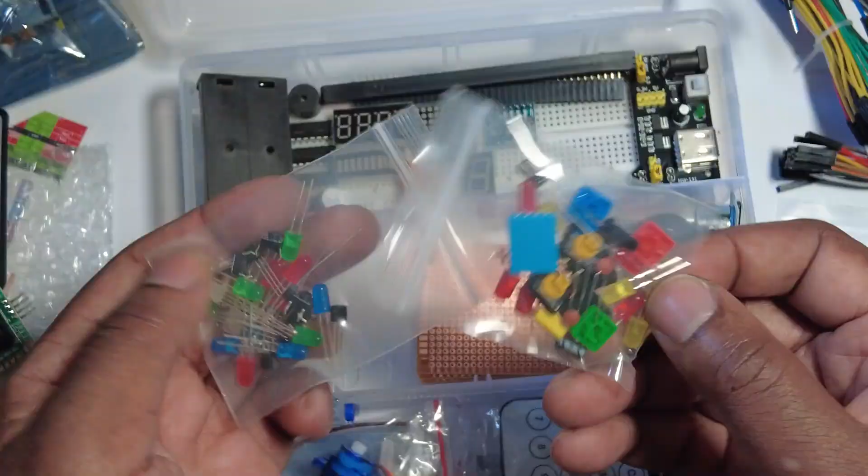Long story short, there were just too many factors working against the project, from my limited experience with electronics and grand designs to the recent disruption of having to move.

But let's get something straight, this isn't the end. While it might have been worth a couple more likes than usual if I made the deadline, it wouldn't be worth rushing the process. After all, I want the final product to be spectacular. This is a silent mode project, and with patrons or without, it makes far more sense to regroup and aim for an even better result next year.

Since the last episode, the focus has shifted toward the Advent Calendar's design. Although more work could have been done with the electronics, especially dealing with this expensive 12-volt motor and motor driver, I realized that the design would dictate the electronics.

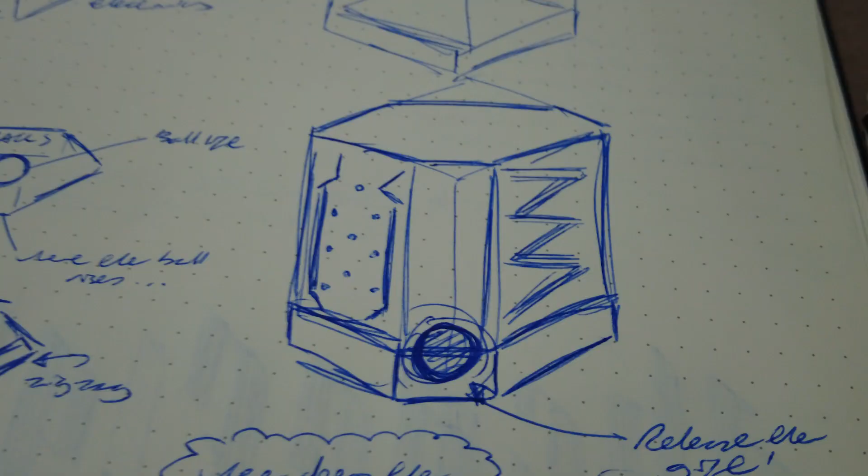So the original idea was to have the ball either travel down a plinko board or a zigzag path, depending on which side of the gate it fell through. Considering how we could easily see both options, the first thing that came to mind was this unusual diamond-shaped design, a world of difference compared to the initial brick-shaped monolith I had in mind. The general idea was to have a view of both boards from the front, so whichever path the ball took, we could see it traveling.

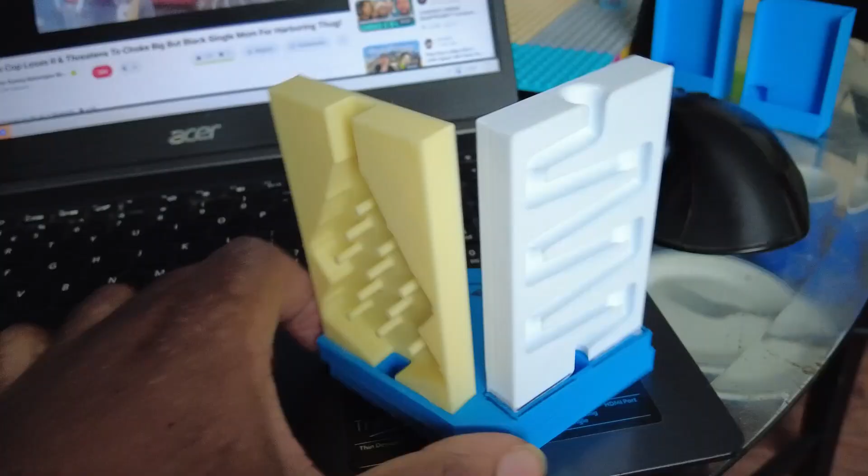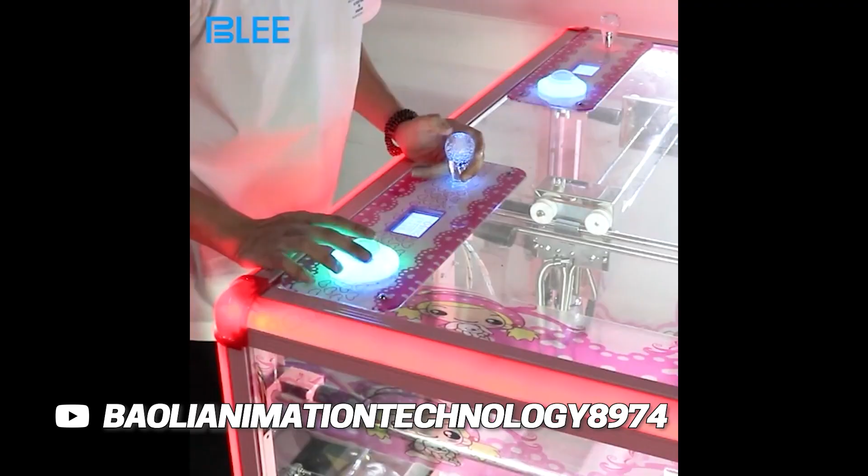If there was any chance of having at least a design before the deadline, I had to think about simplification. I mentioned in the last episode that using sheets of acrylic or plexiglass for the frame would make sense. I really like the idea of a transparent body that reveals the innards of the Advent Calendar, which lends itself well to lighting and the design of moving parts. Just as importantly, it would save on 3D printing time and materials.

As Carlos mentioned during his talk at Printed earlier this year, not everything has to be 3D printed. One of the most valuable skills a maker can have is discerning which techniques to use and when.

Considering how this Advent Calendar would be produced and assembled, I immediately turned to Ben Heck's approach, designing something that can be taken apart. I decided the best way to design the machine was in modules, individually produced parts that work together. The ball lift mechanism was the first module to work on.

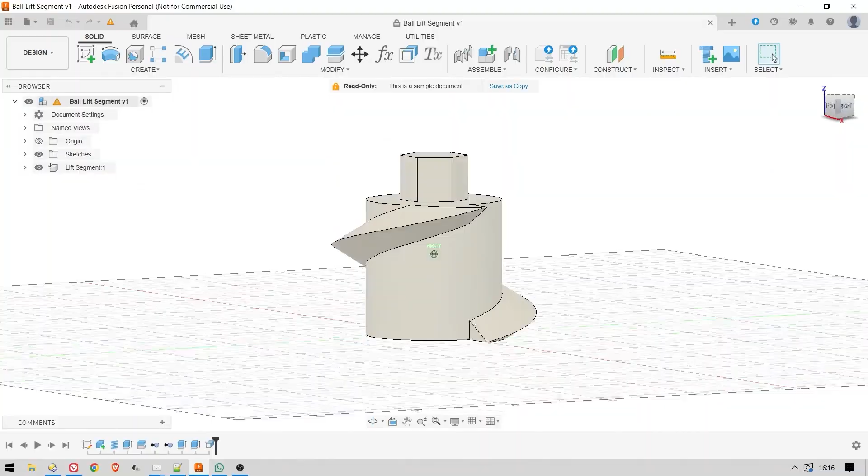I realized that it didn't have to be as bulky as first intended. All it's doing is pushing the ball upwards against the surface. All that matters is that the threads can fit one of the balls. At this point, I had no idea how tall the ball lift had to be.

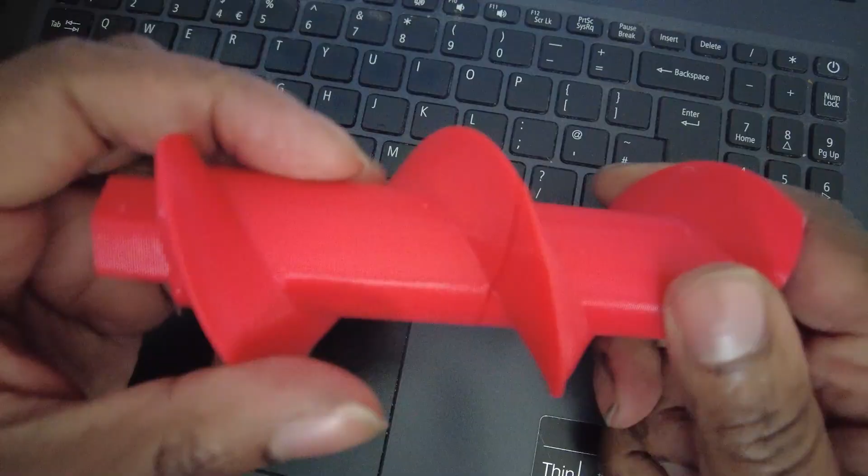However, I did have the idea to divide it into smaller sections that fit together. Not only would I be able to make the ball lift as tall or short as required, but I could also produce these parts on my A1 Mini if necessary. Another benefit is the possibility of a multicolored ball lift if I produced them in different colors.

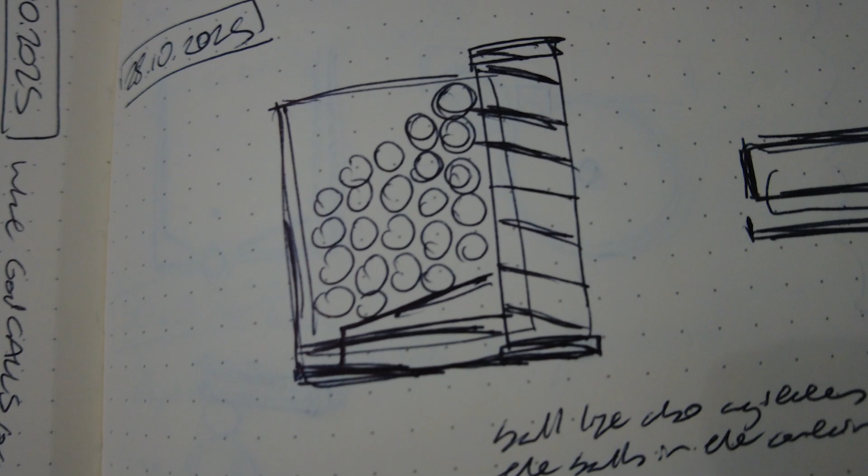Where things started to fall apart was with what ironically should be the simplest thing, the ball feed. Having all the gifts in a simple container, as with a typical gumball machine, would conserve the most space. For visual effect, I wanted the balls arranged in a single depth stack, but this reintroduced the possibility of jamming during dispensing, which I obviously want to avoid.

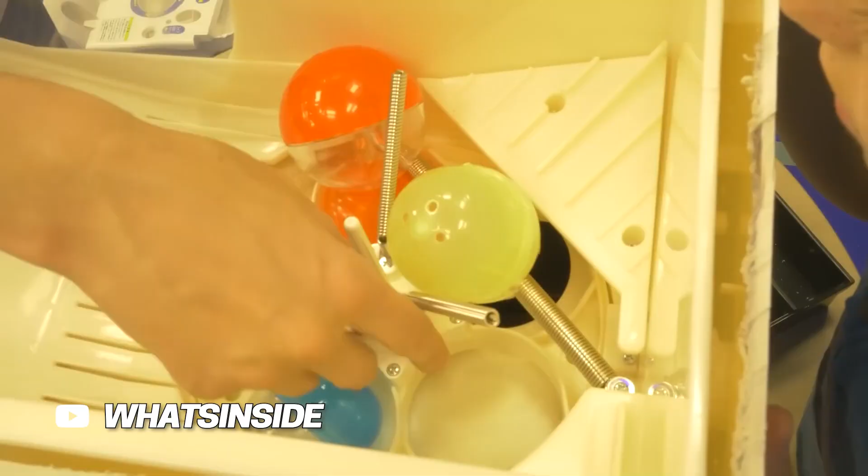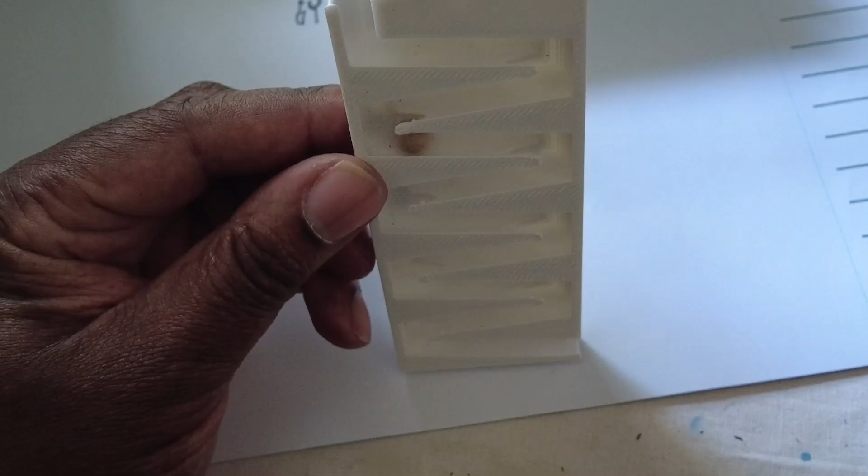The problem is solved in actual gumball machines by using an agitator, a device that moves the balls around inside the container. Right now, I can't figure out how to incorporate this into the current design without eventually reverting to the wheel mechanism. If there was any chance of still making the deadline, I had to simplify the design further. Because the emphasis was on feeding the lift one ball at a time, I eventually decided to repurpose the zigzag path as a modular ball feed. This also revived the idea for a diamond-shaped machine.

Up to this point, I was working at a small scale using 8mm wooden balls. Arseni suggested I should produce the parts at full scale instead, which seemed counterproductive but actually made sense.

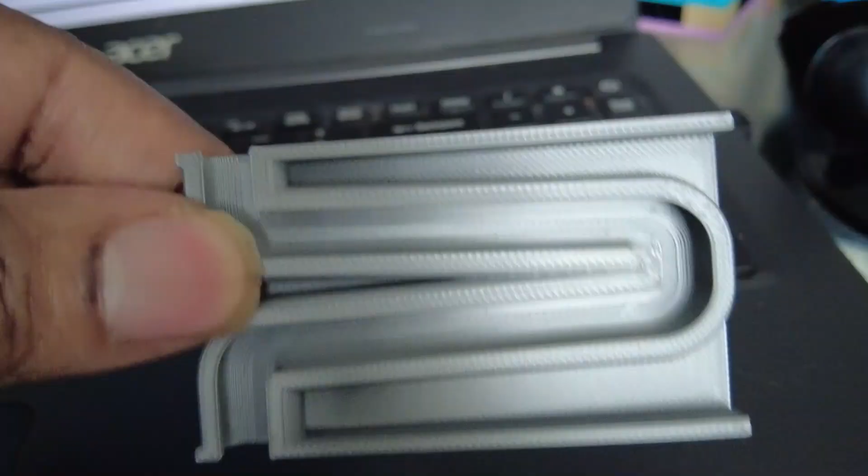Although it's faster to 3D print smaller models, many details are easily overlooked, including measurements and settings that don't translate well when enlarged. This becomes especially important when producing the final parts, as we risk wasting time, energy and material if we get just one thing wrong.

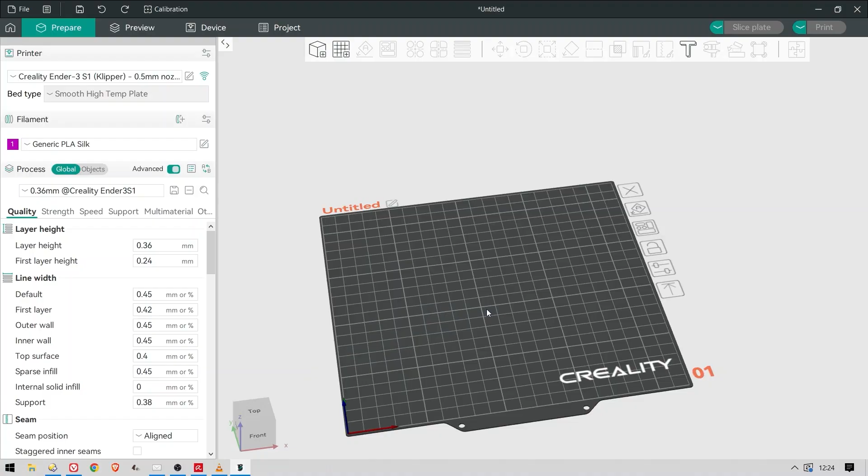Because I was still convinced I could meet the deadline, I went right into it with the updated zigzag module. First problem: the model is too big to fit on any of my printers in one piece, which meant dividing it into smaller pieces. My first call was to use Luban to divide the part into modules.

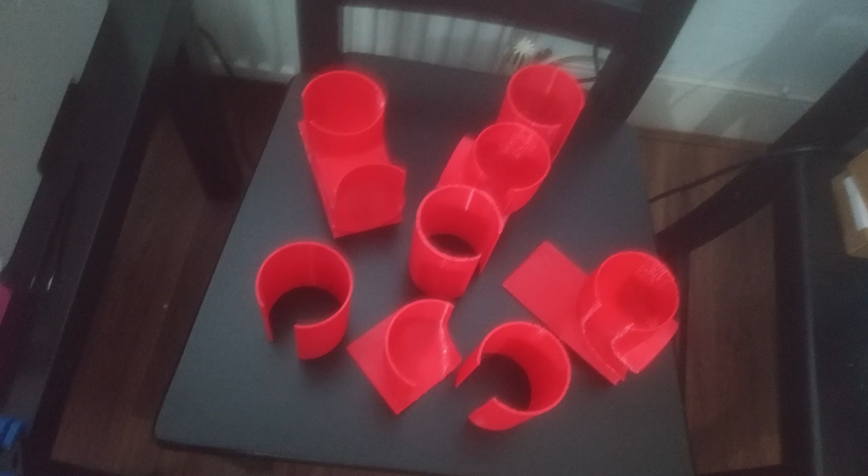I've had success with Luban on its own for other projects, but the size of this model meant obtaining a trial license. The Luban divided models printed okay on my Ender 3S1, and the measurements seemed just fine. Attempting to put the whole thing together was a different story. A better solution was to divide the model in half in the slicer, with both halves fitting on the printer.

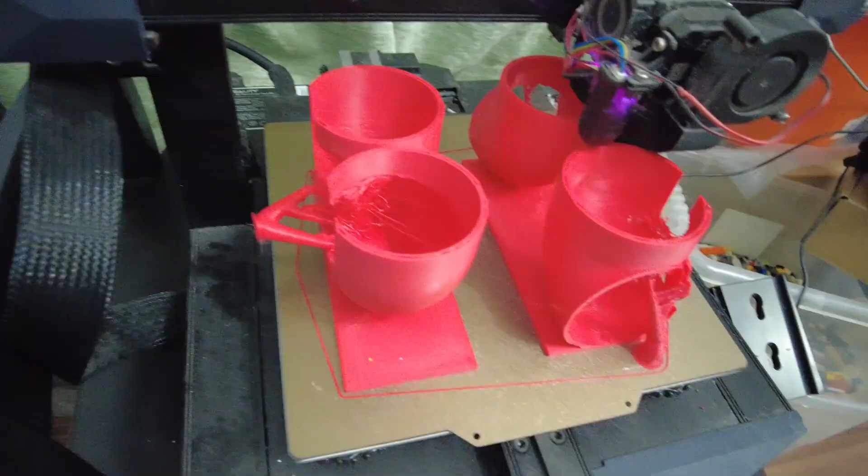No Luban license required. Second problem: print orientation and the use of support material are more important than we think. It's more trendy than common sense for people in the 3D printing space to design models that don't require support material, although we know they can be a pain in the neck to remove.

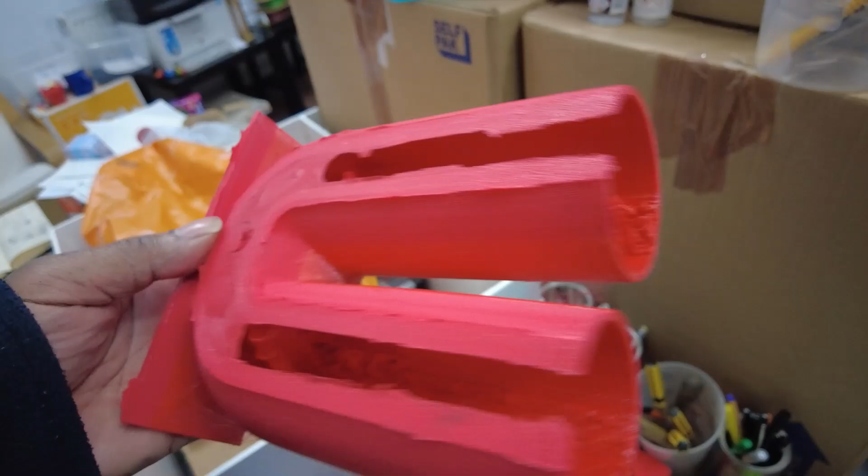In this case, the remnants of the support material render the print completely unusable without extensive work. What you might not know is that the model's orientation on the print bed is related and just as important. In addition to determining whether a model requires support material or not, it can also impact the final print's measurements.

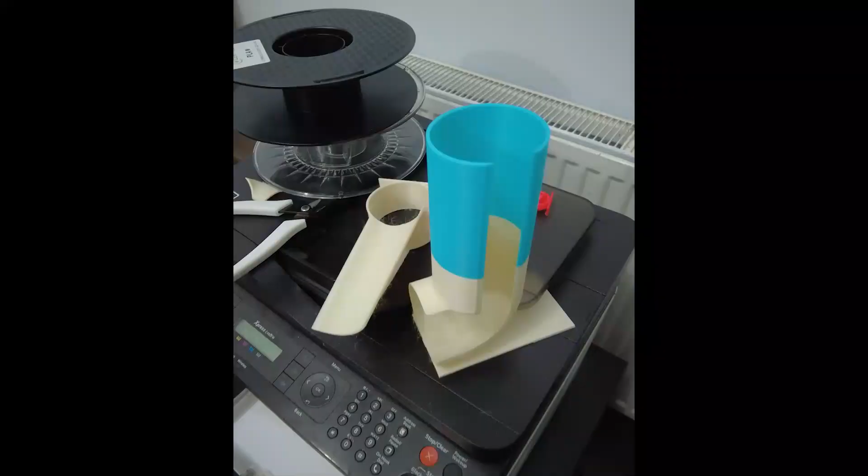and texture. Third problem: imagine waiting for goodness knows how many hours for a print to finish, only to find out you've gotten a key measurement wrong.

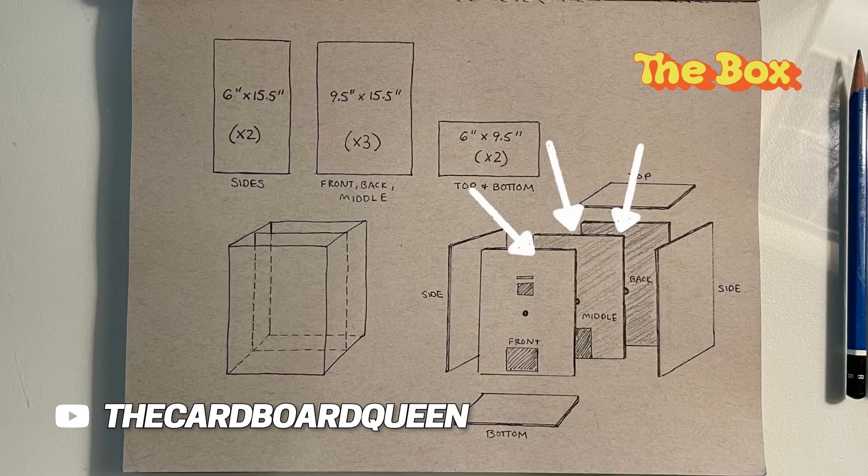Thankfully, I just printed one half of the model, and this is a great case for using unwanted or undesirable filament for prototyping. In hindsight, the best strategy would have been to avoid 3D printing and instead start with good old-fashioned materials. As they used to say, measure twice, print once.

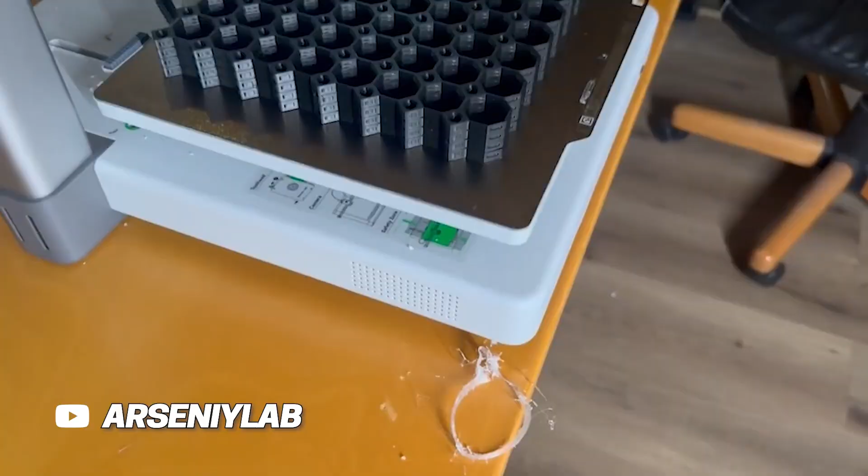I've been faithful to my Ender 3S1, which is now called Ancient Technology. However, I've decided to replace it with an A1 based solely on my printing requirements. I've also been impressed with the A1 Mini and was inspired to go for the A1 by ArseniyLab.

I pledged only to buy an A1 if I could find one under £200, and I immediately thought of getting one second hand. As luck would have it, Bambu Lab's Black Friday offer meant that requirements would change. But let's get one thing straight, I'm no panda, and you won't see me badgering anyone into buying a Bambu Lab printer.

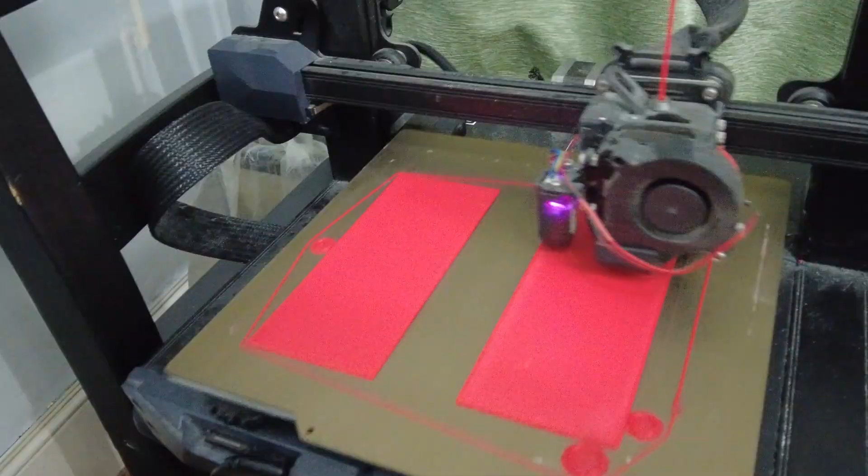Although it's not a fair comparison, this half of the ball feed module took around 15 hours on the Ender 3S1 with a 0.5mm nozzle, and around 9 hours on the A1 with a 0.8mm nozzle.

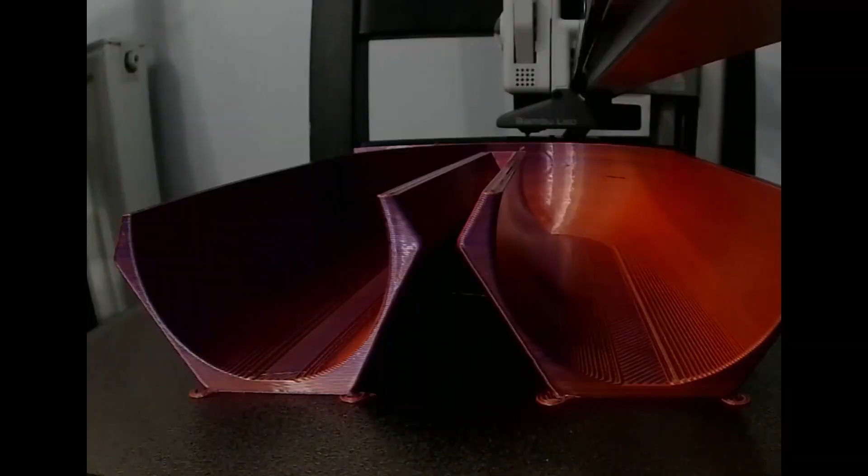Out of curiosity, I researched how much it would cost to have the ball feed module produced elsewhere. Of the places I found that suggest they can print it in one piece, the quote for 2 copies was just as much as for a new printer before shipping.

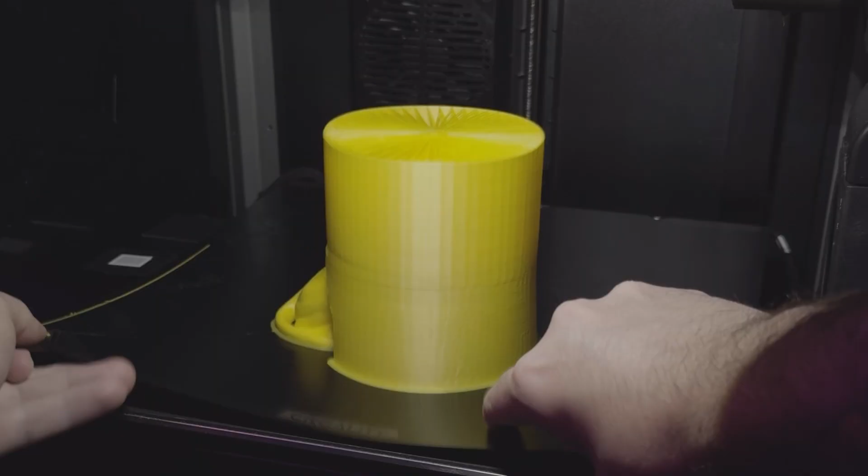If it's just a one-time thing and we don't need a 3D printer, or we're not sure we can print the parts in good enough quality, it makes sense to go down this route.

As much as I like to pretend everything went according to plan, sometimes it's necessary to take an L. Whether it was being too ambitious, inexperienced, or both, meeting the December 1st deadline was unrealistic.

Even without things going horribly wrong this year and circumstances beyond my control, a huge oversight was underestimating how long each step would take. Example circuits and small-scale prototypes are completely different to building full-scale modules and a working machine.

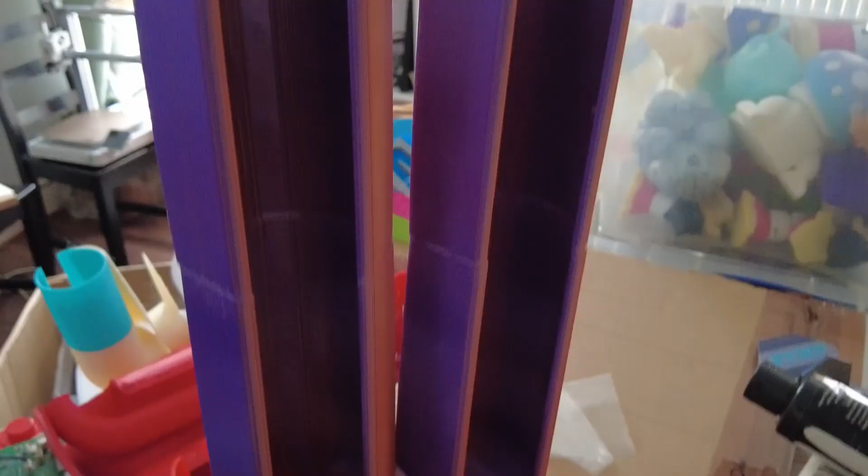With that said, I'm not giving up on the project. The new goal is to have the first version of the Gumball Advent Calendar, complete with build, ready for next December. That gives me plenty of time to make the project as great as it deserves to be, whether it's adding those extra bells and whistles, refining the design, or both.

Ironically, the progress made to date could lead to getting support for the project, perhaps even that elusive sponsorship. Above all else, everything you've seen from these episodes was a learning experience for future projects.